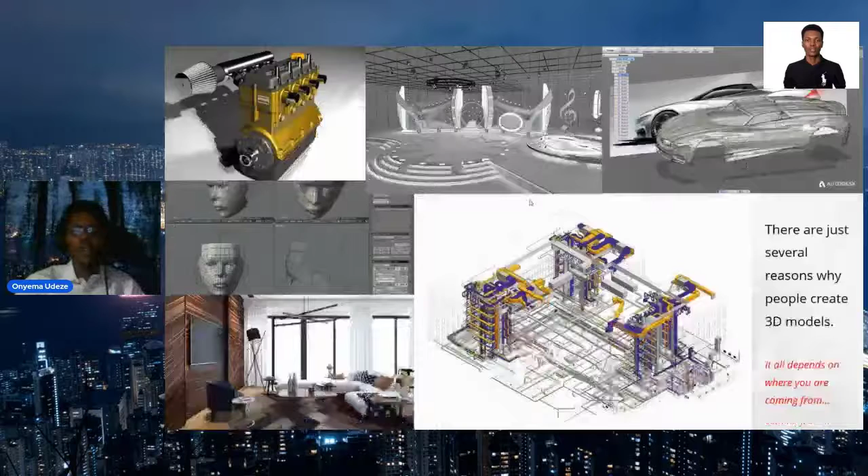So this is not all the reasons that people create 3D models; people create 3D models for so many reasons. But these are some of the options I put up to get information from people. So when you actually look at this slide, you see that people create 3D models for a lot of reasons. Someone can create a 3D model for product design purposes.

Maybe you're designing a new product. You can create 3D models to see how the parts come together. You can create 3D models for scenes, maybe an entertainment scene, like a movie. You can use software like 3ds Max to create a scene that simulates how the characters come together. Even the automobile industry creates 3D models to simulate their products before fabricating or producing them. People also create 3D models for animation purposes, creating characters for movies.

And as architects or professionals in the built sector, we also visualize our projects, so we create 3D models for rendering purposes. More recently, we're beginning to create information-rich 3D models to build our BIM models.

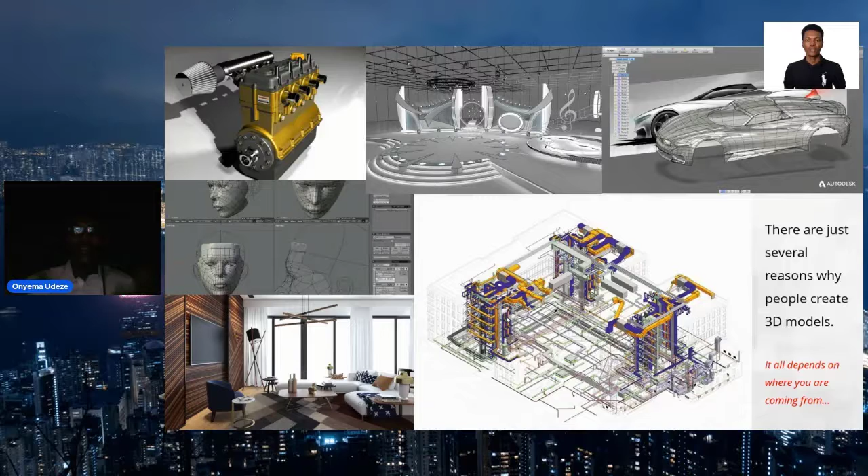So there are just several reasons why people create 3D models, and it all depends on where you're coming from and where you're going to - what do you want to do with the graphical and non-graphical information you're creating. That's just a typical scenario. 3D modeling is just an example, but it points to the fact that we can do similar things and yet produce a completely different outcome for completely different purposes.

So when you look at that, you see that in the industry today, some things on the surface level seem as if they are the same, but when you investigate further, you see that people actually attach different meanings to the same thing. At the end of the day, they create completely different outcomes. The meaning we attach to things is often based on our expectations and perhaps our experience levels.

When you look at the built sector today, you see that we've made a lot of progress in digital transformation and technology adoption in the past few decades. We've quickly progressed from a 2D drafting workflow to a 3D modeling workflow. Some people call this a progression from documentation to data optimization, while others call it a progression from CAD, computer aided design, to BIM, building information modeling.

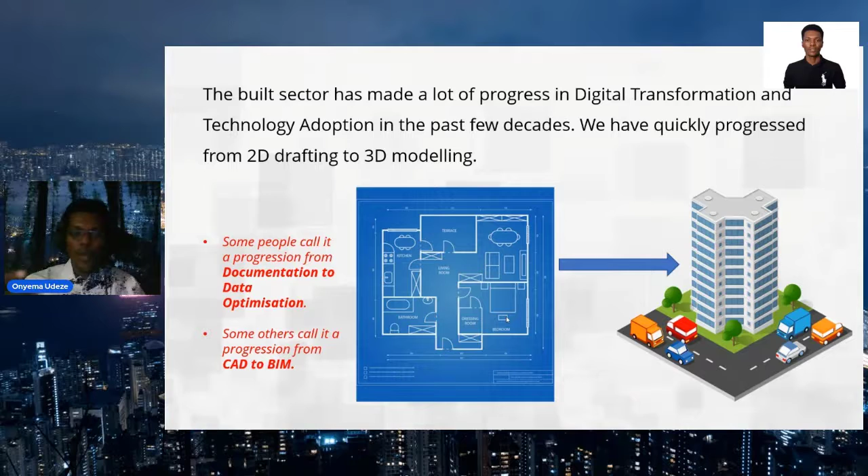So when you look at this, you tend to think that BIM actually means the same thing, just like 3D modeling. You might think BIM means the same thing to every stakeholder in the built sector, until you begin to search for the meaning of BIM on the internet. If you go to Google today and type in 'what is BIM', you'll be surprised at the amount of definitions that come up.

Some of these definitions come from professionals, some from researchers in the industry, some from software vendors. There are different stakeholders in the industry, and we tend to attach different meanings to something that on the surface level you think is actually the same thing. So this session I'm actually throwing it out open - what exactly is BIM, and what does BIM mean to you?

One of the most popular definitions of BIM is the one from the National Institute of Building Sciences, which defines BIM as a digital representation of the physical and functional characteristics of a facility that serves as a shared knowledge resource for information about a facility, forming a reliable basis for decisions during its life cycle from inception onward. This is quite a mouthful, but basically it looks at BIM as an information-centric process that creates a digital version of a facility, and that information serves as a basis for making decisions across the entire life cycle of a built asset.

It's a general definition, but when you look at this in more detail, you see that this is not necessarily the same meaning people attach to BIM when they implement it on projects. Just think about it - the bottom line for implementing BIM on a project for a design consultant is typically different from that of a general contractor. When a consultant implements BIM, the firm tends to think more around design and planning related aspects, while a contractor focuses more on the construction and implementation aspects of BIM. So the bottom line for both parties isn't necessarily the same thing, but on the surface it appears to be.

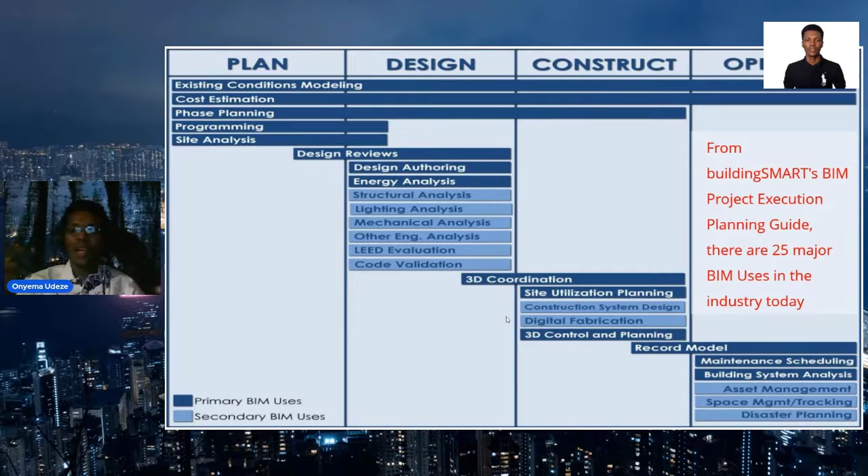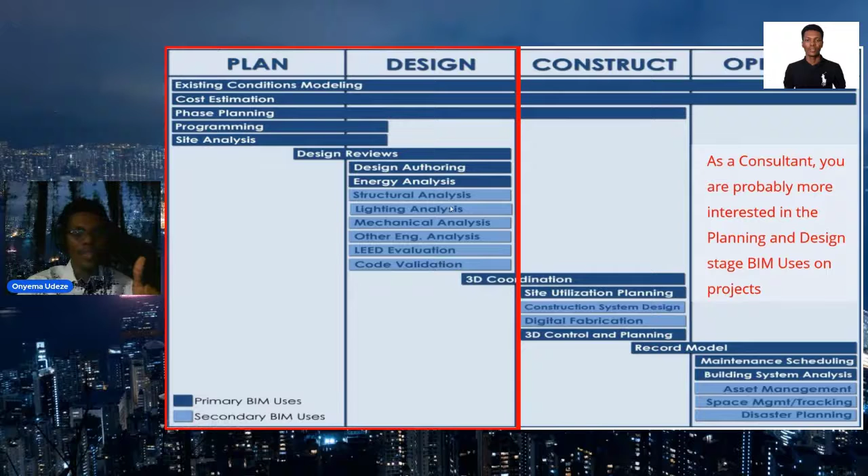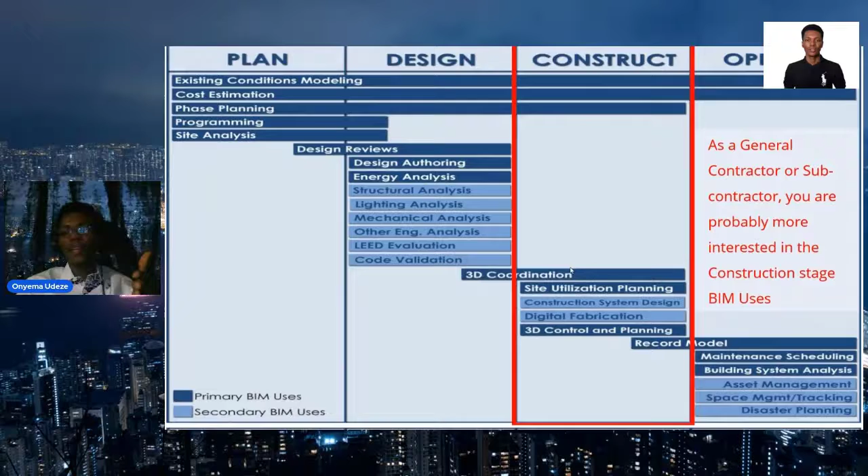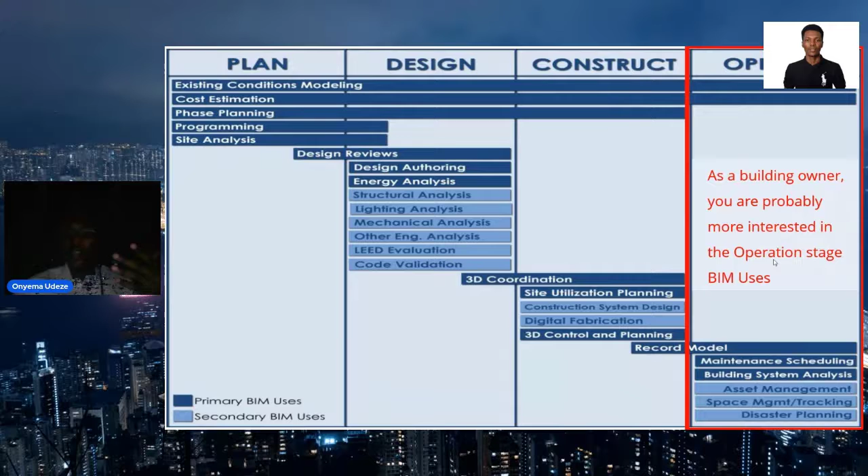Let's look at it in more detail. As a consultant on a project, you're probably more interested in the planning and design stage BIM uses — the ones that come under the plan and design phase. As a contractor or subcontractor, you're probably more interested in the construction stage BIM uses, the ones under the construction phase. And as a client or building owner, you're probably more interested in the operation stage BIM uses. So you see, we are all implementing BIM on projects, but the reasons why we implement BIM can differ among different parties and stakeholders.

So while the industry has made a monumental leap in recent years from just 2D drafting to optimizing data towards these diverse BIM uses and even more, you see that the workflows are still generally siloed. We still tend to work in silos, even when we are all implementing BIM on projects. To a very large extent, we are still working in silos.

I mean, if you take as an example the traditional contract or delivery method of buildings, which is popularly referred to as design-bid-build, there are three major stages of delivering a built asset.

You have the design phase, where the various consultants can come together. In an ideal scenario, they will collaborate and coordinate with each other to produce the designs for the project. During this phase, you produce all the various multidisciplinary models, drawings, details, and whatnot. After that, that information, drawings and models will now be used as a basis for bidding. Then, depending on the method used, maybe the lowest bidder from the contracting side will win the contract.

So when you look at this, during that design stage, these consultants didn't get much information from the contracting side. Eventually the contracting side will use that design to implement the project. And at this stage, when the contractors and subcontractors begin to deliver the building, they also receive very little or no information from the consultants.

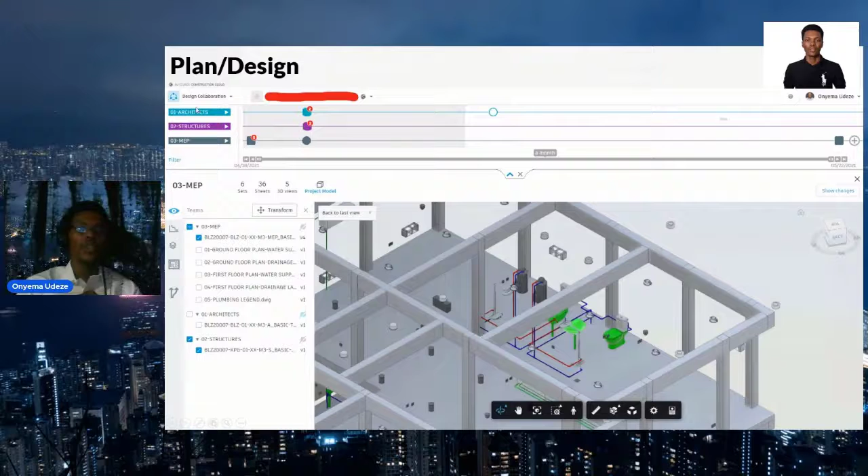When you look here, this is currently the design collaboration module. There are different modules that come together for this planning and design phase. Design consultants on a project, the people that work mostly at the design phase, can collaborate and coordinate in real time using the design collaboration, document management, and model coordination modules of this Autodesk Construction Cloud. Depending on your own use case, pain point, and business value, you choose the modules you work with. For the plan and design phase, you work mostly with these three modules.

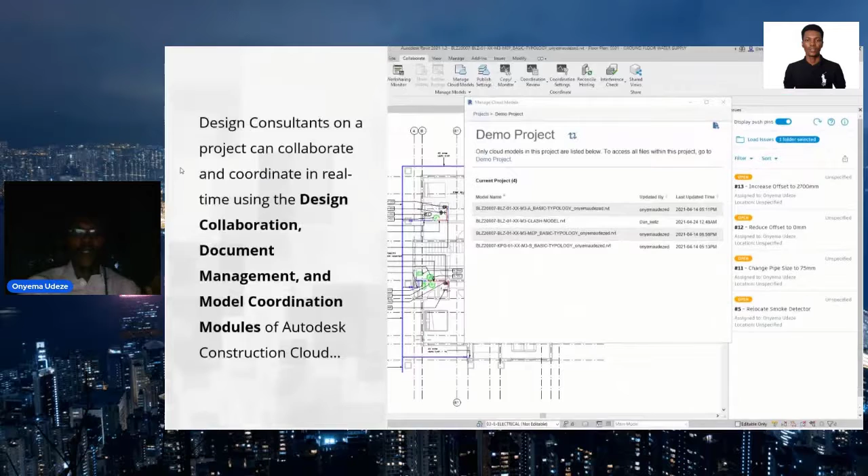All these come with Autodesk Docs, which is a document management module. This is a cloud-based solution, but on the cloud it can open over 70 different industry file formats - spanning beyond Autodesk software, even files from other vendors like ArchiCAD, and can be opened either on the cloud or through a mobile app. As a stakeholder in the industry, you don't necessarily need to have software like Revit or AutoCAD to open the files. The consultant or designer can send the 3D model, just share the link with you.

You can open it on the cloud and make your inputs - navigate around the 3D model, cut a section through it, make annotations without necessarily having to have the software. This is how these cloud-based tools are beginning to connect all the stakeholders on a project in real time, and remotely, because it's cloud-based. You can communicate and coordinate from any part of the world.

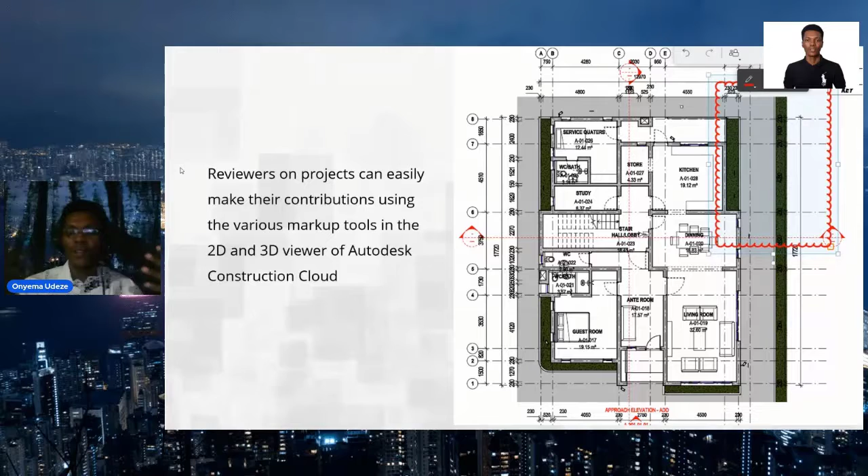Changes across different versions of 2D and 3D files and documents can be graphically reviewed right on the cloud. Let's say you're working on a project and you update to a new version - someone who wasn't part of the design team can easily go compare the new version with the older one. You can check what has been added, removed, or modified, even filter this by disciplines or by categories of elements, so a person can graphically and visually see what has changed without necessarily being part of the design team.

These are ways you can see that these tools are beginning to connect different stakeholders. As a BIM manager or project manager on a project, you can just go in there, compare two different versions, and see the changes between those two versions.

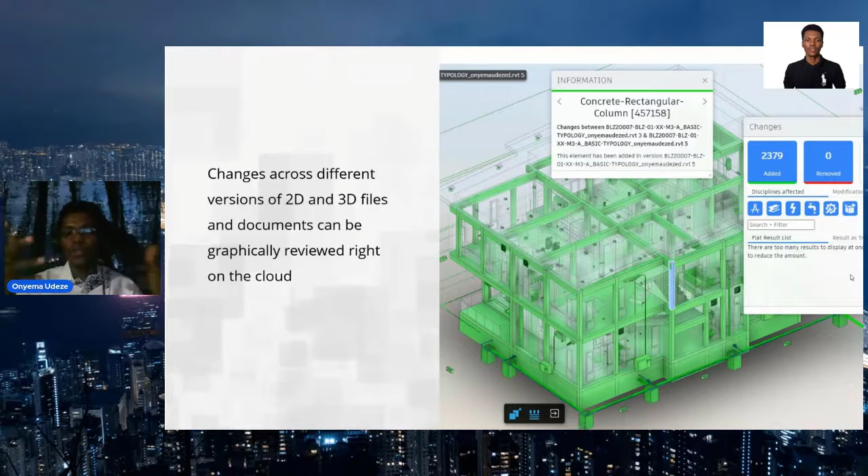Those are the kind of things you see during the design and the planning phase of a project. Even clashes between the interdisciplinary models can be easily identified and resolved through the combination of the authoring tools and ACC platform. So for example, what you see here on the screen is a federated model, a combination of the architecture, MEP, and structural model. Everything has been combined into one.

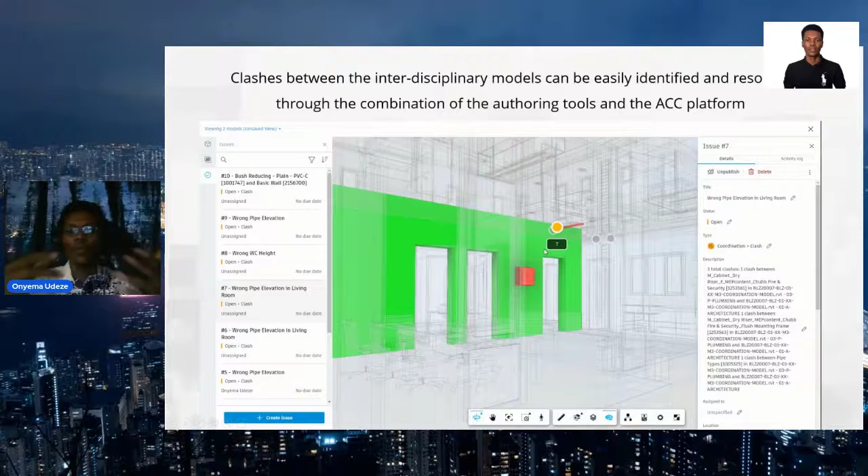Then as a reviewer on the project, you use the model coordination module of this platform to identify clashes. For example, here you can see some pipes that clash with a wall. You can see the list of issues that have been identified during this coordination.

Even at the moment, softwares like Revit and Navisworks now have what is called an issues plugin. So while the reviewers are identifying issues on the cloud, they are seeing the same issues through the plugin within their modeling software. So you don't even need to send a file to someone.

Maybe what most people do at the moment is finish creating the model in a modeling software, and then the reviewer will use another software like Navisworks, and after that the person will send you back a report. Yes, it's quite efficient, but it's not that efficient.

Imagine someone is making revisions and identifying issues on the cloud, and you are seeing it in real time within your modeling software, and resolving all those issues. So you are working in your own software on desktop, someone is reviewing it on the cloud, and everything is connected. This is what we're looking at as the era of connected construction. You don't have to create so much communication gaps between the various stakeholders on a project.

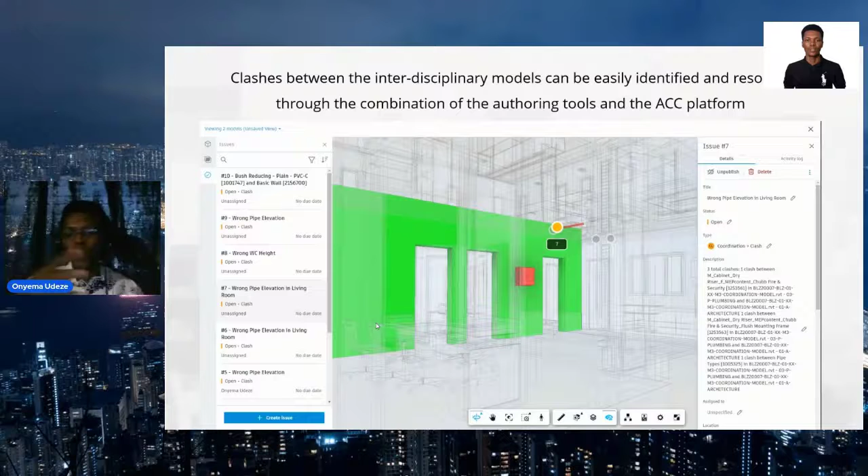So those are the design and plan stage. Now I want to also look at the build and the operate stage. After you've designed, which is mostly the consultants, now you are moving to the field, which is mostly the contractors and the subcontractors.

This same platform, because everything is unified under the same platform, you also see how these contractors can communicate with other stakeholders on the project in real time on the field. This is just one module, the build module here. So you see the various features that actually make this possible. This is the home page here.

You can begin to see things like the percentage completion of the project, when the project will even begin, the sheets on the project, the members on the project. You see weather information about the location of that project, the location of the project, the activities on the project, and all the RFIs, requests for information, that's ongoing on that project.

You can see even the members on the project, how many of them have the most up-to-date information on their mobile app, which is called the mobile sync status. So if you don't have the latest information on the mobile app, you see the percentage of the members on that project. Most people working on the site are not going to site with their laptops and all that. They have the mobile app, which is actually the PlanGrid Build app. That app synchronizes with this platform, and you can coordinate.

All these features are also on the app. You can coordinate everyone on the app. I will go through some of these features in a bit. When you look at it, you see there are general contractors, subcontractors, suppliers, manufacturers, clients, consultants, and every other major stakeholder on a building project. They can coordinate in real time on the field using the build, document management, and cost modules.

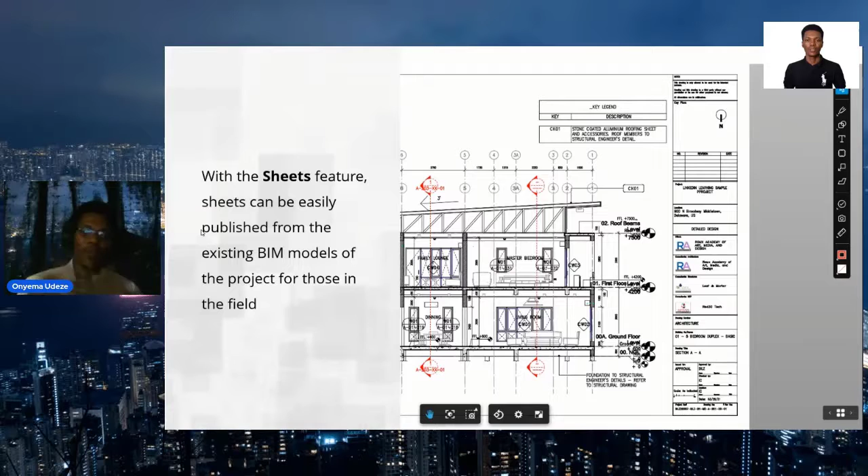From there you can publish sheets directly to PDF and send them to the folder of the guys on the field. So you don't need to elongate the entire communication—it's within the same platform. You just go to the 3D model, export to sheets, and send it to the folder. Tomorrow, if there's an update, you repeat the same process, and the version number will just update. This makes the whole communication very seamless. That's what the sheets feature is basically used for.

And they also have the forms. As project managers, this form enables them to set up activity checklists and also collect information from workers on a job site. Imagine you have workers on site and you need a series of activities that they will perform in a day. You can just create a form, or basically a form template, for them.

At the end of the working day, they go in there, create a form using that template, and you as a project manager just come in and check the checklist that they've done all the things they're supposed to do on the work site. That's basically what the forms tool here is used for—mostly used by project managers to manage the workers on the site.

You can see what the content of the template can contain—things like the work log, the materials, the equipment, and even their signature. This actually makes life easier for the project managers, having a central platform through which all the workers on the site can report their daily updates and progress reports.

And then, of course, you have the issues. We've already seen the issues when talking about model coordination. The issues feature helps identify anomalies on a project, whether during design or on the field. With the issues feature, you can identify these anomalies and begin to address them. For example, here you can see some of the issues that have been raised on the project—each issue has its own ID, and you can see the status and type of the issue.

Issues can arise during design—for example, you identify a clash, raise an issue about it, and the guy creating the 3D model can resolve that issue within the BIM model. You can also be on a site and see something that needs to be rectified, and create an issue out of it. You can snap a picture and attach it to that issue, assign the issue to someone, assign a due date and priority to it, and comments can be created and raised on the same issue until eventually it's resolved. When resolved, all you have to do is come here and change the status of the issue. That's a typical example of what the issues feature does for you.